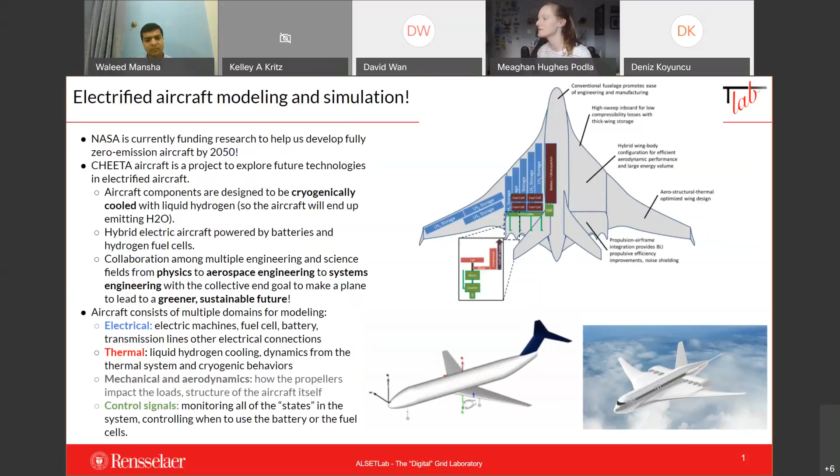So here's an overview of how the aircraft would work. We have liquid hydrogen storage and different fuel cells, all with cryogenically cooled transmission lines and bus bars going to the motors. In the power system we've developed, fuel cells power a series of motors to propel the plane, and power is transported from these fuel cells and battery systems via cryogenically cooled components.

We're building up these liquid hydrogen fuel cells alongside the newest fuel cell research, so we have to work with all the groups to make sure the new fuel cell research is being modeled and simulated properly, building off the basis of what we have right now. We're also working with novel superconducting machines - similar to standard synchronous machines as our basics, but with different types of losses and structures from conventional machines. And we also have novel cryogenic transmission lines.

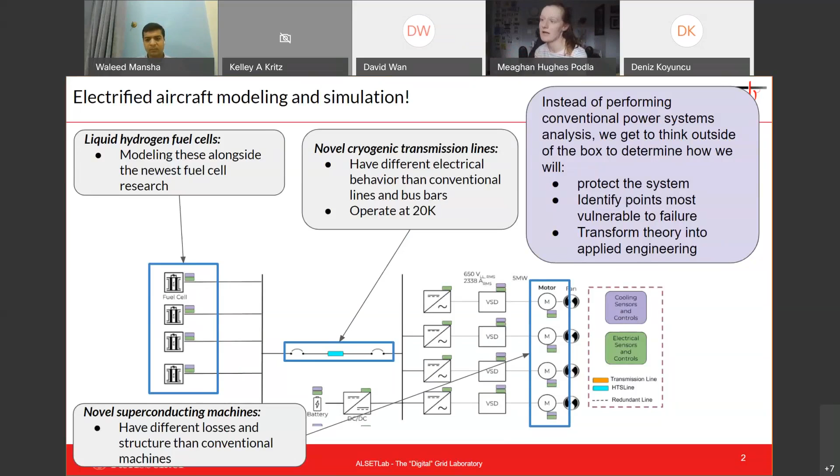These have a different behavior than conventional lines and bus bars. They're operating at 20 Kelvin, so they have a standard structure like a coaxial cable, but the current and voltage losses are much more nonlinear than a standard coaxial or pi line transmission line. So instead of just performing conventional power systems analysis with these models, we get to think outside the box to determine how we're going to protect the system, identify points most vulnerable to failure, and then transform the physics theory on cryogenic operation and novel components into applied engineering.

I also work with electric vertical takeoff and landing modeling and visualization. I've been developing an open source library to make multiple domain drone and eVTOL models. I've been modeling the electrical, mechanical, aerodynamic behaviors of traditional drones and all of their controls that dictate their behavior. All of these models are equation-based to reflect the physics in each component in the system, and we're doing this to be able to export these into virtual reality simulations as well.

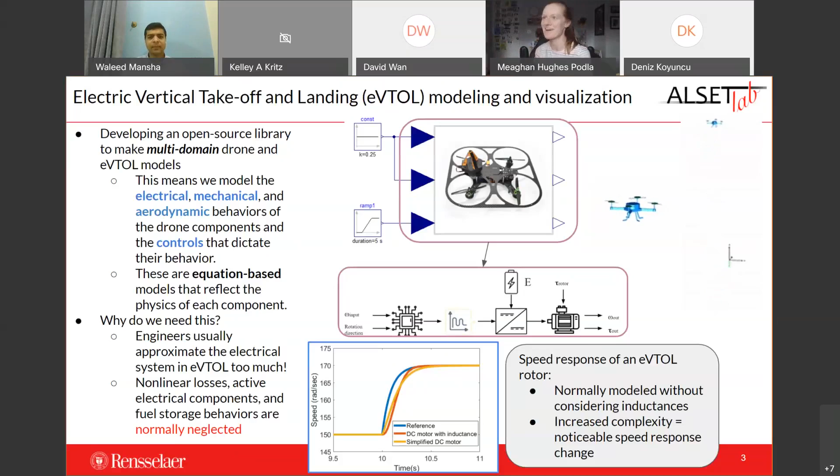Thanks. Yeah, so for this modeling, you use that tool - I think Professor Manfredi introduced that once, Modelica or something. Cool, cool. So for the current graduate students as well, if you have any questions for any of the speakers - I know this might be one of the first times we're also looking at each other's research work - so if you're curious about anything, feel free to ask, or put it in the chat and we can ask that as well. Thanks, Meaghan, interesting, thanks.

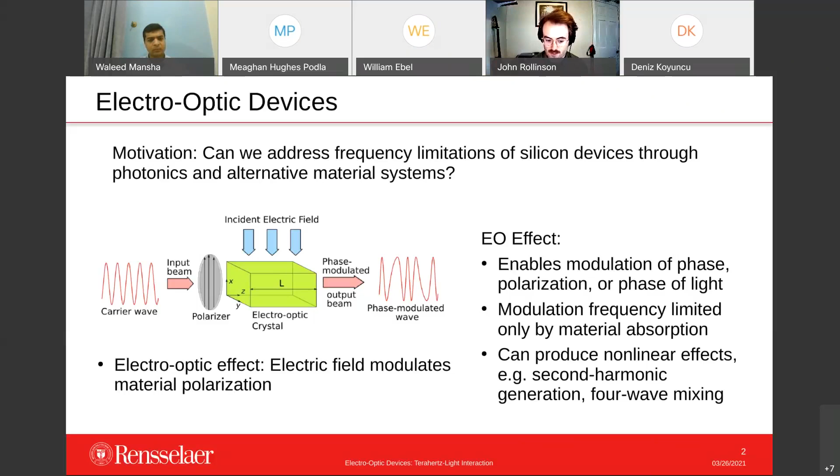We can also do more interesting things with these materials, specifically nonlinear optical effects—things like second harmonic generation, four-wave mixing—more advanced physical concepts that I won't talk about too much today.

The main applications of electro-optic devices are where we want to map information from the electrical domain to the optical domain, to either manipulate or transmit that information. For example, in telecommunications—probably the single biggest application of electro-optic devices—they're used for inline fiber modulators. This is basically how all fiber optic communication is done, through modulation of the amplitude or phase of an optical beam in the fiber optic cable.

But we can also use it for other applications. We can make free space electric field sensors, where an electric field propagating through space modulates light in the electro-optic sensor, and from that modulation we can infer information about the free space electric field. We can also do optical frequency comb generation, useful for optical metrology or generating supercontinuum optical sources.

We can do second harmonic generation, which is essentially doubling the frequency of an optical beam. We can shoot a laser through an electro-optic material, and by engineering the polarization of that material, we can actually double the frequency of the light.

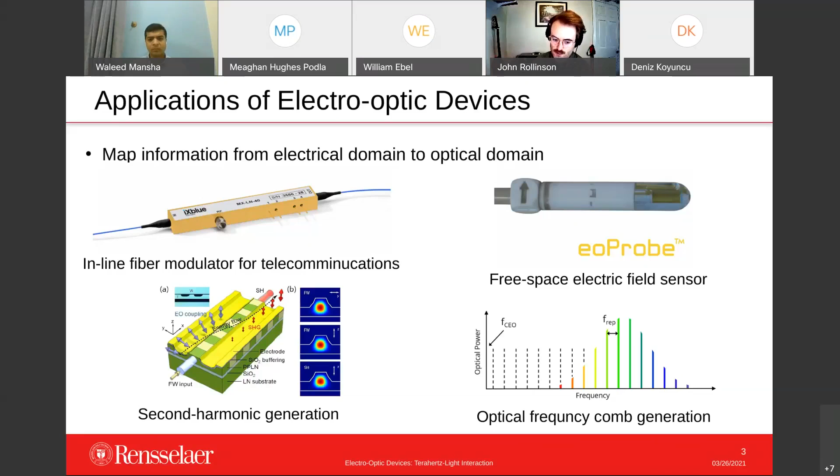One specific electro-optic platform we're interested in is called thin film lithium niobate. Lithium niobate is probably the most widely used electro-optic material, simply because it's relatively easy to grow and has a very high electro-optic coefficient, so we can achieve very good modulation strength easily. It also has a very large bandwidth, typically greater than 1 terahertz, depending on the device design.

Specifically, the platform we're interested in is lithium niobate on insulator. If you're familiar with silicon on insulator technology, lithium niobate on insulator is created in a very similar process—essentially a smart cut process—where we end up with a very thin film of lithium niobate on top of, most typically, silicon dioxide, and then on top of either another lithium niobate wafer or a silicon substrate wafer.

The real advantage of this thin film technology is greater control over the optical properties of the lithium niobate. We can control the effective index of the lithium niobate in a thin film version better than we could in the bulk version. We can also eliminate some non-ideal characteristics of lithium niobate, such as mechanical absorption modes.

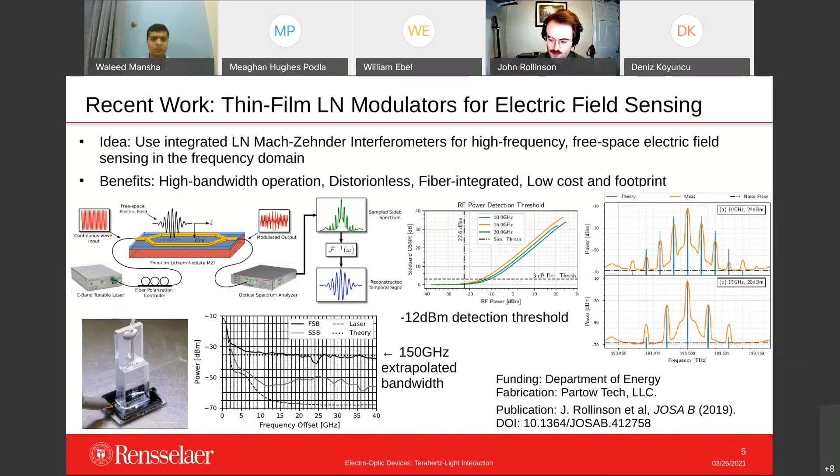This work was also recently published in the Journal of the Optical Society of America, and the publication information is in the lower corner here. Okay, so that's all I have. Thank you for your attention and time.

I think you're muted, Waleed.

Thanks, John. I had a quick question. So the device you're talking about, when it's operating in the modulator mode, can you do the inverse phenomena, use the modulator as a demodulator as well, where you're using the same setup with light?

The effect basically only works in one direction. You can generate modulation in an optical signal using an electrical signal, but you can't use the modulation of an optical signal to pick up the electrical modulation. Unfortunately, it only works from electrical to optical. To convert from optical back to electrical, you need something like a photodetector to sense the signal.

I see. And then what kind of transitions do you have when going from the fiber to this lithium niobate? So basically, what it uses is... I'll just try to reshare my screen quickly.

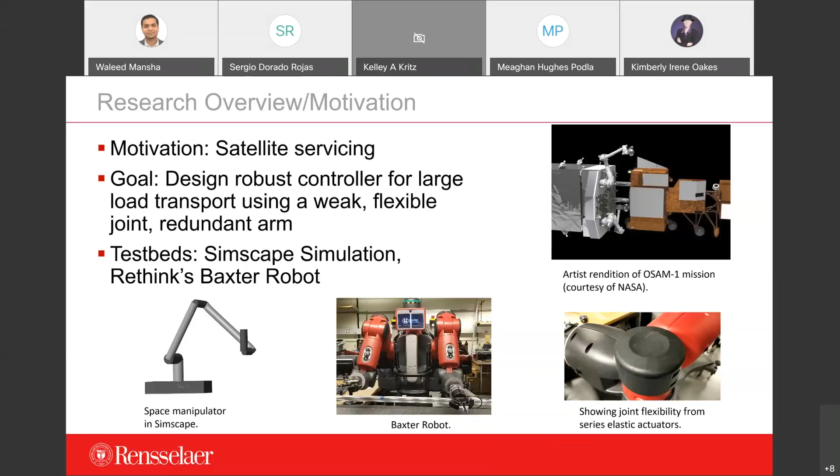Baxter also has a pretty low payload capacity, about 2 kilograms per arm, including the mass of the gripper. So this low payload capacity and joint flexibility make it a really good qualitative representation for a space manipulator.

When you're designing controllers for such a system, there are a lot of difficulties caused by the nonlinearity of the joint flexibility and also the resonant mode. When you have a system with a resonant mode, you can have significant oscillation at whatever the frequency of the mode is.

When you add a really large load to the end of an arm, you get a significant lowering of the frequency of oscillation. This means even slow movements could cause very undesirable performance of your system.

To counteract this, some will design controllers with really low bandwidth to help avoid the oscillation, but this in turn causes really poor tracking performance because the response of your controller is very slow.

So what I decided to do is use optimization to try and tune the controller gains so that we limit the resonant mode while also maintaining a relatively high bandwidth.

For Baxter, we have to collect experimental frequency response data because we don't have a high fidelity dynamic model. We actually use the data directly in our controller design rather than doing a model fit, because we don't have access to a lot of the low level signals needed to perform a traditional fit to a typical flexible joint arm model. In addition, Baxter also has a lot of low level controllers whose dynamics we don't know.

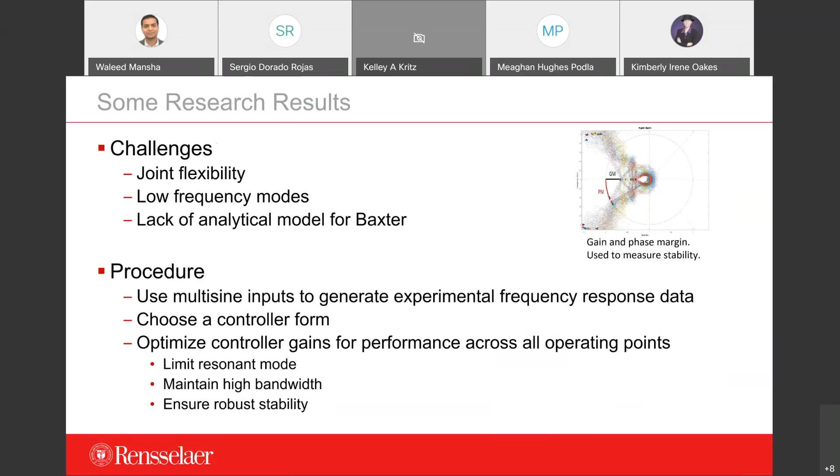Also, because Baxter is nonlinear, we have to collect this data at a range of operating points, and this helps ensure that we maintain the performance throughout the entire workspace.

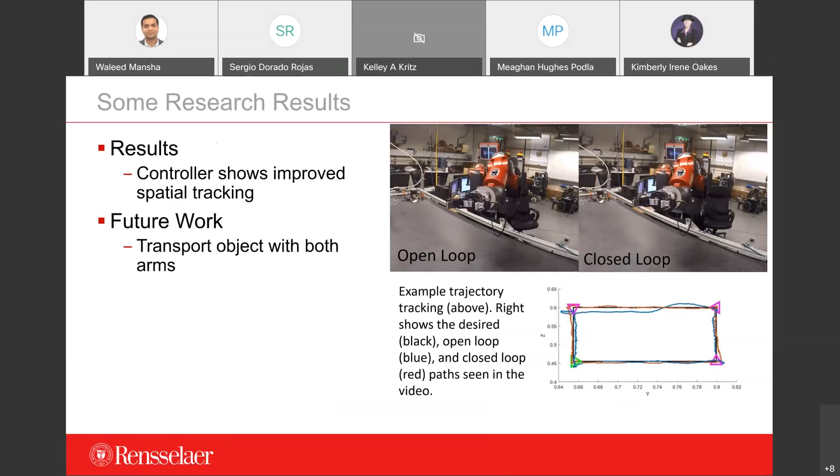We have also tested with an additional load on the single arm and still had the same type of performance improvement. For future work, we want to implement these controllers in a dual arm case and see if performance is maintained when you have the two arms coupled by a rigidly grasped load.

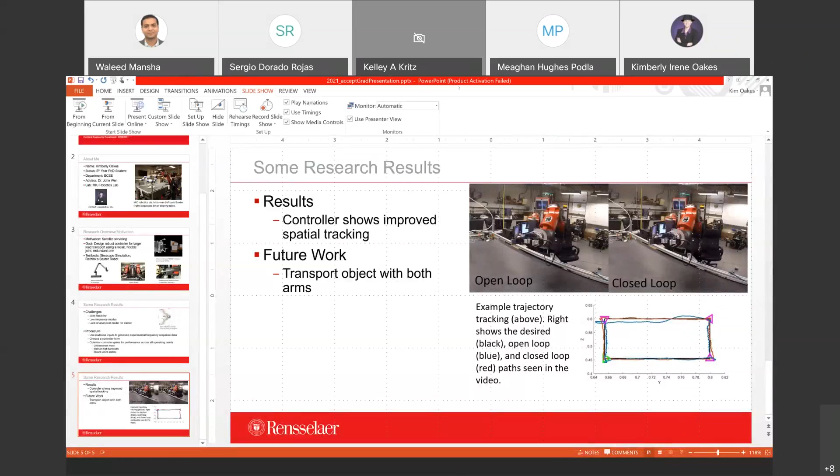Thanks, Kimberly. I had a question. So when we're talking about space, what would be an application for like two arms?

So there is some interest. The OSAM-1 that I showed actually does have two arms on the satellite that will be going up and servicing. However, right now they're only using one and kind of just going to have the other one as a fail-safe. But there is a capability of having two arms, so it may be possible that if you use both, you have a more stable grasp and can more easily avoid oscillations when transporting the large load.

I see, thanks. The other thing would be, in space, the weightless environment, how would you quantify a load? Like what's a bigger load and a smaller load in space? Is there a metric?

That does depend a little bit on the capabilities of the arm itself, because there's actually a pretty significant number of space manipulators that have already been implemented, and their payload capacities in space actually do vary quite a bit. So it does depend a little bit on the arm capabilities themselves.

Okay, thanks. Anyone else has any question?

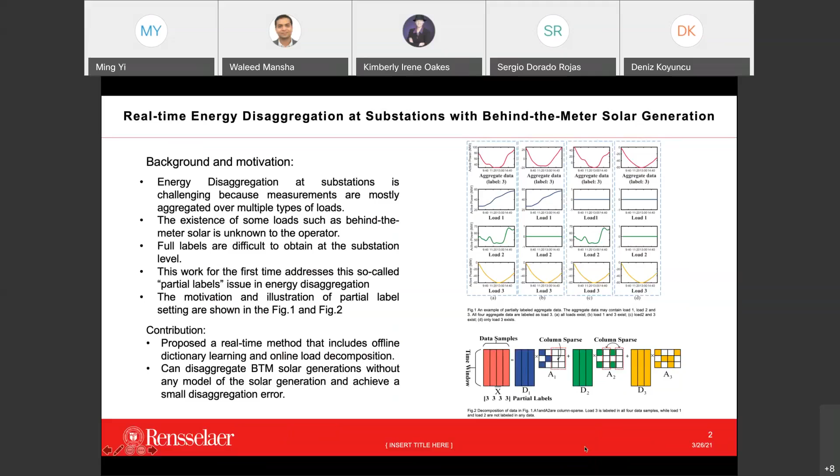The conclusion is that this work, for the first time, formulates the problem of load disaggregation with partial labels and offers a model-free approach with low disaggregation error. Here is the proposed algorithm.

We use several metrics to measure the disaggregation error, and here are some numerical results. We tested our algorithm on a generated partial labeled dataset. This dataset contains three types of loads and has three partial labels. Gamma equals 50% means measurements labeled as load 1 contain 50% pure load 1 and the remaining 50% data contain mixture measurements. This is similar for data labeled as load 2 or 3.

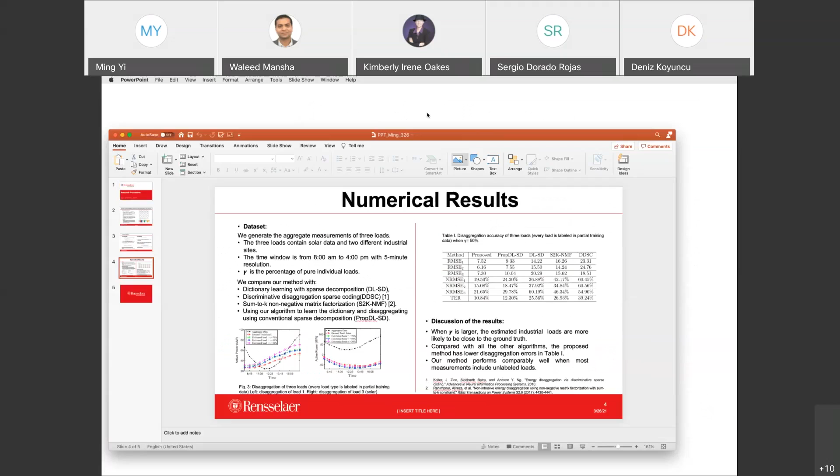Hello. Okay, let's share the screen. Hopefully it's going to work fine. Is it lagging or working correctly? Can you hear me? There might be a bit of lag. Can you see my screen currently? You cannot. Okay, I think it's pulling up. It's just a black screen. Yep, so right now it works. So the funny thing is now I have to look into my screen instead of looking directly at the camera. Understand, sorry guys. Let's just go with it then. Okay.

The title is Applying Machine Learning to a Multimodal Dataset. I'm advised by Professor Bülent Yener, who is co-faculty of CS and ECSE. If you're interested in image processing particularly, you should consider this group. I'm going to first describe the dataset we're working on and share some preliminary results. I also have a small section of tips for graduate students. This is my 4th year, by the way. Let's start.

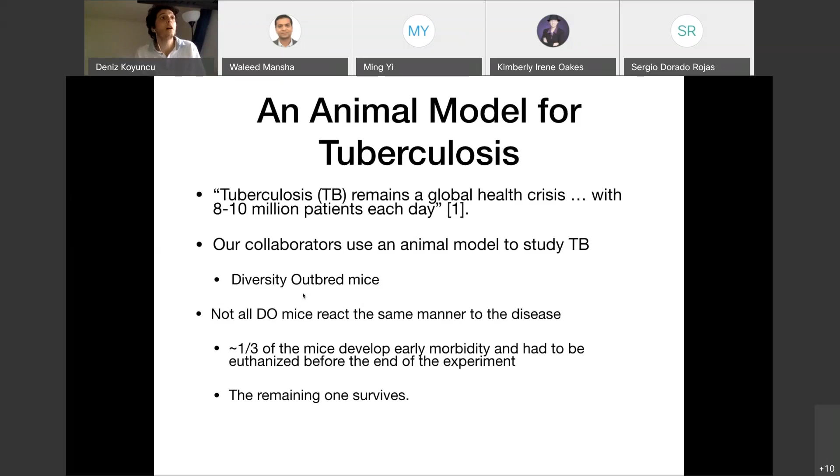So now our part comes in. We have different measurements from different modalities: protein measurements from the lungs, genotype information, single nucleotide polymorphisms—nucleobases where there is difference in the population—gene expression levels, and lung images. The task is to identify patterns that can distinguish between the two classes.

As preliminary results using the lung proteins, we identified two candidate biomarkers, CXCL1 and MMP8, using gradient tree boosting and subset selection. When we tested them in human subjects, we also observed they had some diagnostic potential.

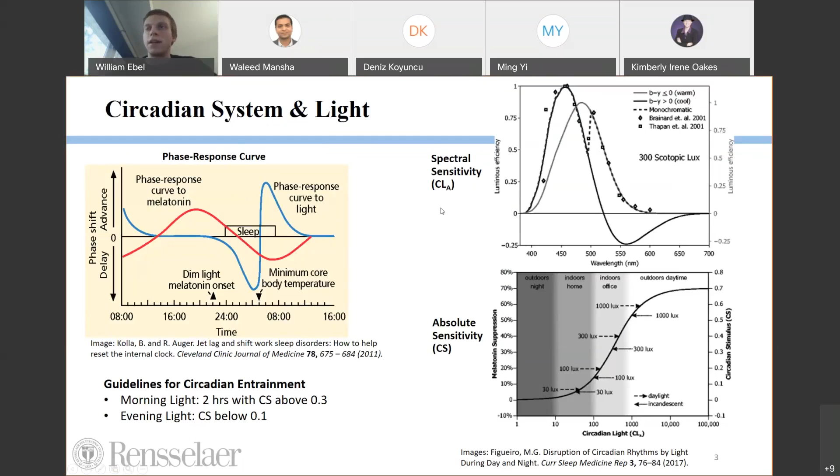I'm primarily interested in this spectral sensitivity that you see at the upper right. This is part of a model developed by the LRC that's based on the neurophysiology and neuroanatomy of the retina. This describes the spectral sensitivity and defines a quantity called circadian light, or CLA, which is sort of the equivalent of luminance for your circadian system. My research really has two parts: the first is optimization, and the second is development of phosphors and phosphor-converted LEDs.

These are just one set that have been developed and recommended by the Lighting Research Center as part of their Class A lighting recommendation. So really what I'm trying to do is optimize the spectrum and learn what characteristics of the spectrum are important for optimizing the circadian impact while still being constrained by these requirements for general purpose lighting.

There are a few different approaches I've explored. One is varying the power fraction of SPDs, spectral power distributions of emitters and down converters. I can also look at more advanced models and actually add some of their parameters to my optimization, such as maybe the peak wavelength of an LED.

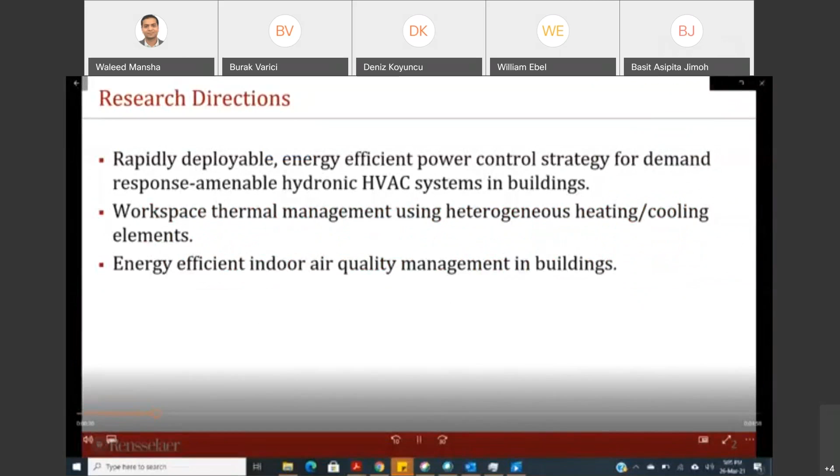My ongoing research has involved developing a rapidly deployable, energy-efficient power control strategy for demand response amenable hydronic HVAC systems in buildings. We have studied workspace thermal management using heterogeneous heating and cooling elements. Finally, we are also working towards energy-efficient indoor air quality management in buildings.

I will now provide an overview of the first research direction while giving a brief background of the keywords in green. Demand response refers to changes in electric usage by consumers in response to high use periods, to decrease demand on the grid and maintain electricity reliability. The consumers are paid for signing up for such programs.

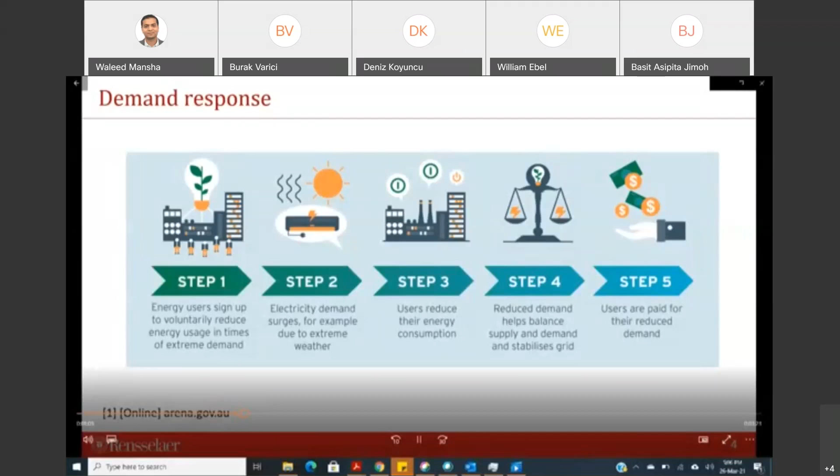Since modern buildings usually do not instantaneously become too cold or too warm, their heating and cooling systems appear to be suitable candidates for offering demand response by allowing indoor temperatures to float between certain upper and lower thresholds.

In this work, we focus on hydronic HVAC systems. These systems involve the circulation of heated water around a building. The heated water transfers its heat to each room through heat exchangers. The water's temperature is lowered and is returned to the boiler for reheating. A similar process involving cooled water and a chiller can achieve the cooling operation as well.

Our work aimed to minimize energy costs incurred by the consumer enrolled in a demand response program, subject to operational and thermal comfort constraints.

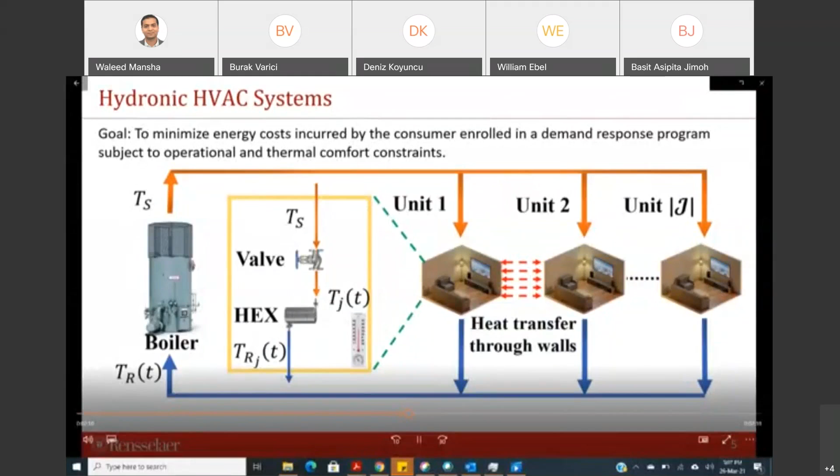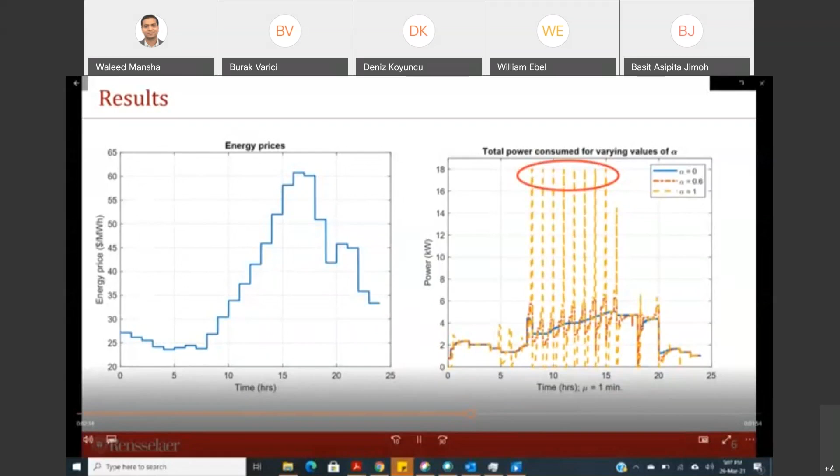The next research direction is workspace thermal management using heterogeneous heating and cooling elements. In this work, we developed optimization frameworks for time-bound pre-cooling and preheating of a workspace in preparation for, for example, a meeting, and for achieving spatial differentiation in the thermal environment.

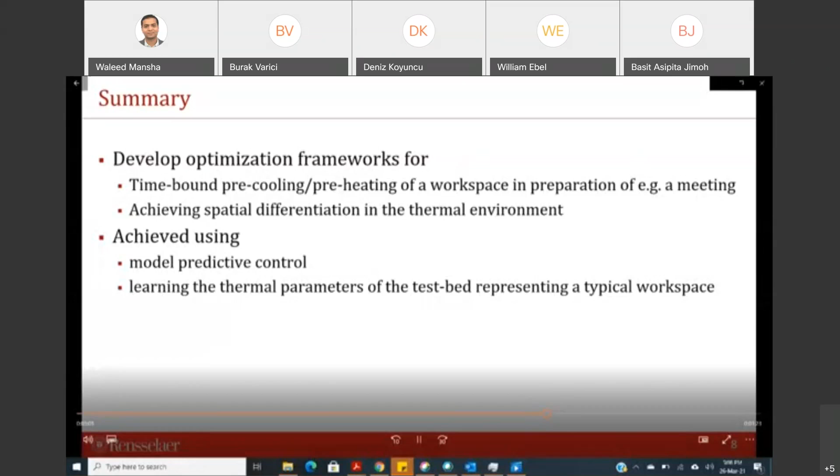The frameworks used learning techniques for determining the thermal parameters of the testbed, and model predictive control to make the approach robust to changes in ambient conditions and imperfections in the thermal model.

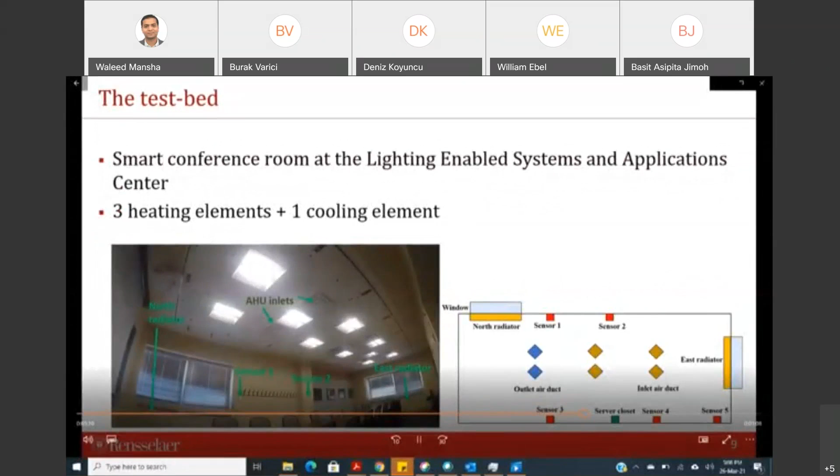The testbed for our experiments was the smart conference room at the Lighting-Enabled Systems and Applications Center here at RPI. The room is equipped with 3 heating elements and 1 cooling element.

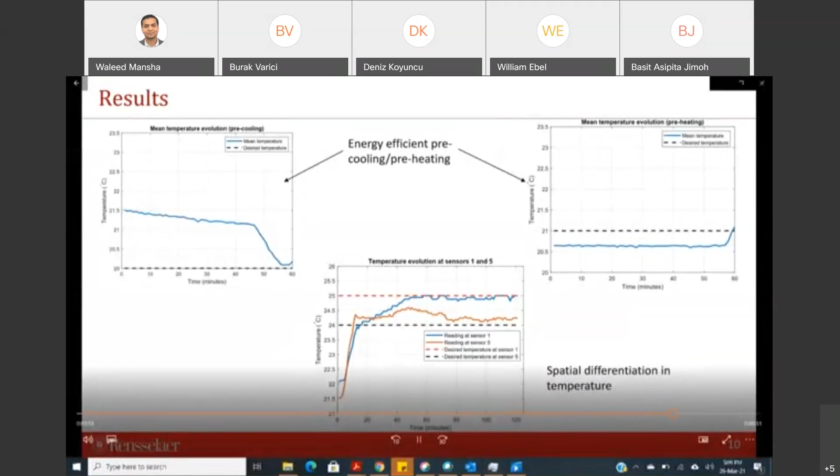The third direction deals with energy-efficient indoor air quality management in buildings. Through this study, we aim to determine how we can modulate the fresh air supply to the building and the mass flow rate of air to individual rooms, to maintain the desired temperature and the indoor carbon dioxide concentration within permitted bounds, while remaining energy efficient and robust to changes in room occupancy levels. This study is in progress.